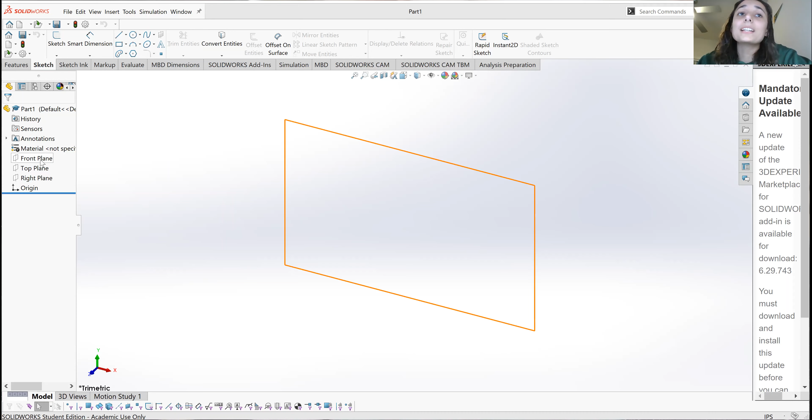Okay, so first off, we have our part open. We're gonna click on the front plane, go up here to view orientation, and go over here to front. You should be able to hover over the different cube positions and it'll show you, oh, this is the front, this is the top. We're gonna go to front. Okay, now we're angled in the position we want to start our part.

So to start a sketch, I'm going to click on the plane I want the sketch to be on. I want mine to be on the front plane—I would recommend the front plane. Then we're going to go up here to sketch.

Once we've clicked on sketch, I'm going to make a center line just for reference, because a little trick we'll be doing after we're done with the sketch is revolving our sketch to make the actual rocket, which is really cool. But you need something for the sketch to revolve around, so we're going to make a revolve line.

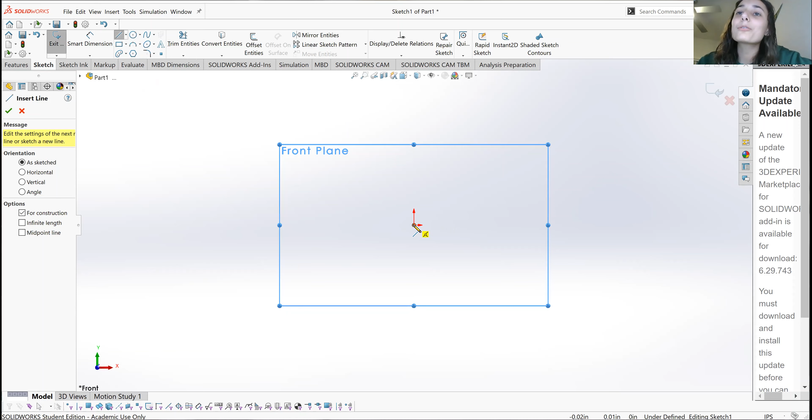So I'm clicking on the origin. You should be able to hover over it and click on it, and it'll turn orange—that means you've selected the origin. Then we're going to drag and make sure it says 90 degrees, then click again to make sure the line has ended.

Now I'm going to click on this line again—you have to click twice when you do the dash line so that I don't end up with a bunch of lines being made and going all over the place.

Okay, so the number one thing to do when making parts is make sure you know your dimensions. One thing I forgot to do is make sure the units are correct. We're going to be in millimeter units because that's what the printer prints in, so it's just easier for the dimensions.

So we're going to go down here to this corner. Mine says IPS—you're going to click on it, and we're going to change this to MMGS, that's millimeters, grams, seconds. So when you're typing in, oh, I want this to be 55, it's going to be 55 millimeters versus inches. I'm going to click on that and make sure it's changed.

Okay, so doing that, I'm going to get back into sketch mode. I'm going to click on this sketch, and then click edit sketch. All right, back to dimensioning.

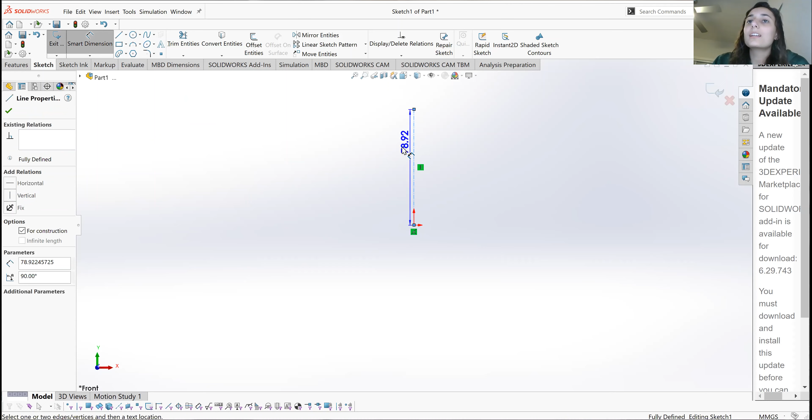We're going to click smart dimensioning, then click on that line we made, drag out, and click again. Now I'm going to make this 195 millimeters because that's the max volume—max height, sorry—we're going to be building in. Okay, so now it's the correct dimension.

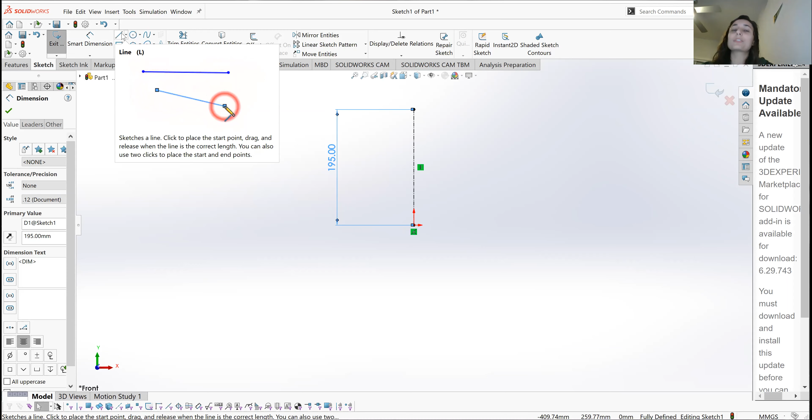We're going to click out of the smart dimensioning by clicking smart dimension again, and go back to our sketches. So first thing I'm going to do—you kind of think of this as the cross section of your rocket, like you took the rocket alongside and sliced it down the middle. It's kind of like the profile of the rocket, and that's what we're making in the sketch.

So right now I'm going to make the bottom. I'm going to make sure that there's an orange highlighted dot—I don't know if you can see this, so I'm going to zoom in so that you can see that.

Accidentally. Okay, we're going to make sure that we clicked on our line, and we're going to make sure that we have an orange highlighted dot, which means the lines are going to be connected. We're going to click on it, drag, and then click again.

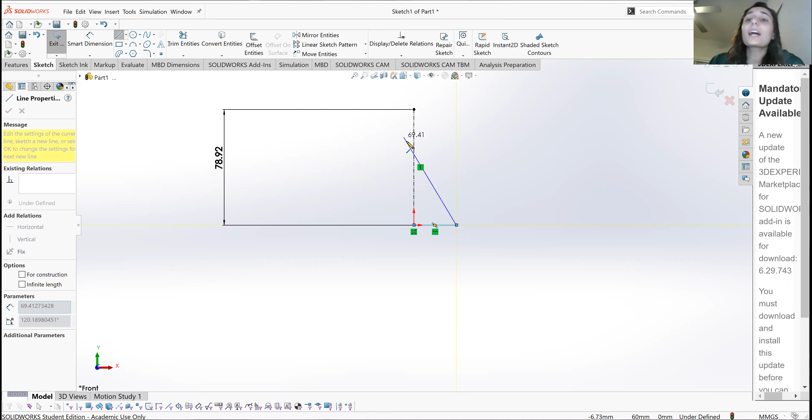Now we want everything to be dimensioned. So once again, we're going to click on this line so it's out of line drawing mode, and click Smart Dimension up here to dimension this line. I'm just going to put 20.

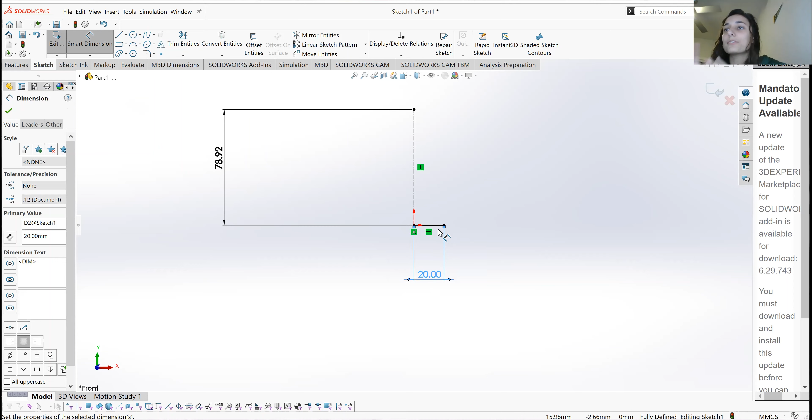Like most of these dimensions you can play around with and do whatever you want with the rocket. One thing to keep in mind is with this distance, you're eventually going to make a hole for the motor to fit in, and the motor's diameter is about 18 millimeters. So the radius is 9 millimeters, and you want this bottom to be almost at least double that, so at least 18 millimeters for this length.

Also, the bigger the base of the rocket, the easier it is to print. But you want to have as light a mass as possible for your rocket so it goes farther. So it's up to you - you're the design connoisseur.

Okay, so we got this line and its dimension. We're going to click out of Smart Dimension, and make another line. So we're going to click on line.

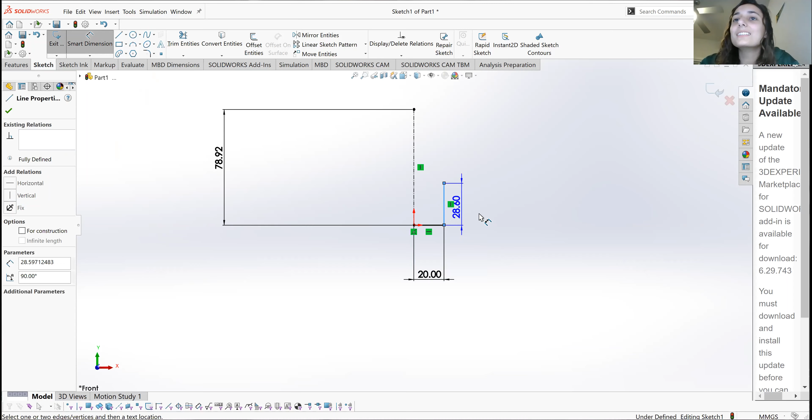Make sure we hover over the other line's endpoint so it's orange, click once, and then drag up and click again. Then we hit line to get out of the line drawing mode and Smart Dimension this line again. I'm going to make this 60.

But you know what, it's up to you - whatever lengths you want to do, you do you.

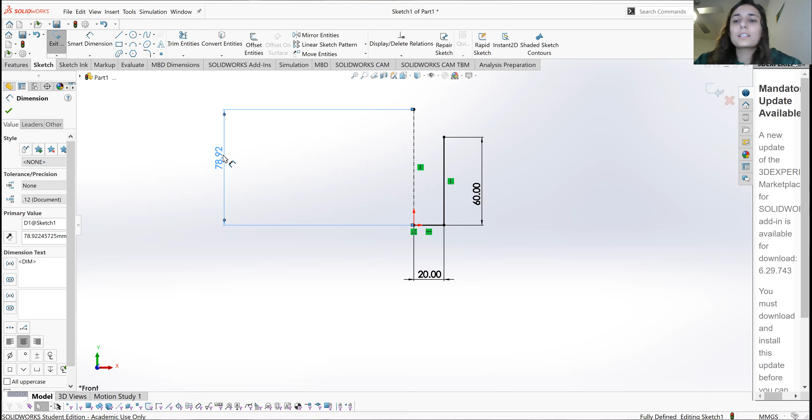Okay, I realized as I was doing this that this dimension is not 195 like I wanted it to be. So I'm going to double click on this dimension and do 195 to make sure it is proportional. Now I'm going to go back to drawing the rocket.

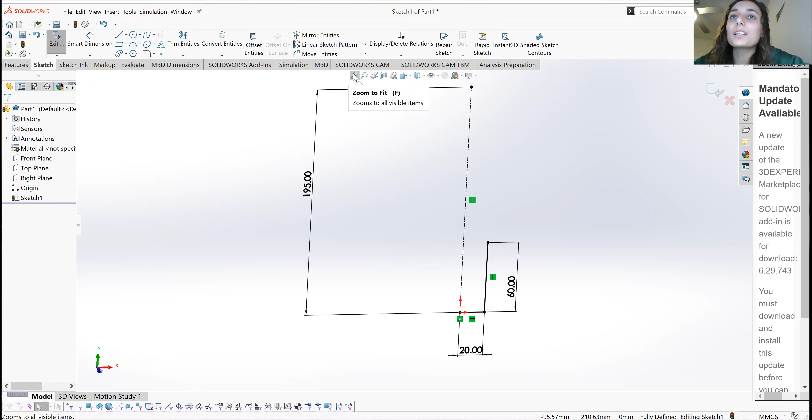So I'm going to make sure - whenever your rocket's out of view in SolidWorks, you can click this button and it'll zoom to fit so you can see the whole rocket. I accidentally changed the orientation, so I'm going back to view orientation to make sure I'm in the front view. You can do front like this. Okay, so back to drawing.

We're going to click another line. Yay, we love lines. And we are going to just draw an angled line.

Whenever you're drawing angles, you want to have gradual movements in and out so it's easier to print. So I'm going to click line again to get that line away so I can Smart Dimension. Okay, I want to make sure this length is 25.

Once again, it's up to you, it's your piece of art - whatever length you want, you do. Okay, I'm going to click out of Smart Dimension again and get on to drawing more lines.

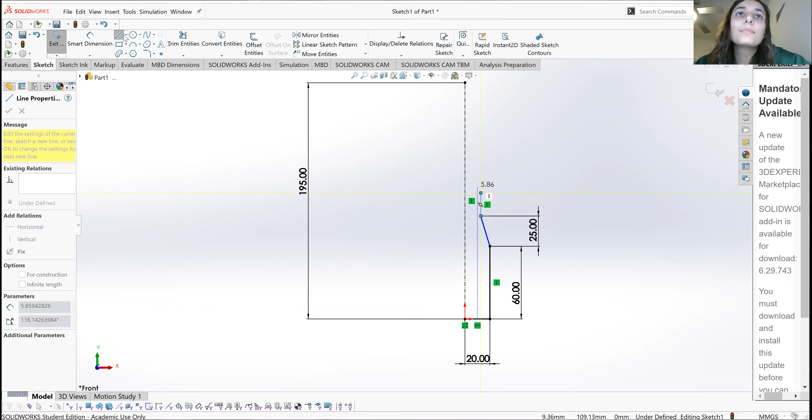I'm going to make sure that orange little dot is there, so the lines are being connected. I'm going to draw another line, click to get out of the line drawing, and click Smart Dimension to dimension that line again. Okay, we have 15 - I'm just picking random dimensions because it's fun.

I'm also going to direct this to be a certain angle, because why not. So I'm going to click on this line and then click on this other line, and when you click two lines in Smart Dimensioning mode, it'll turn into an angle. I'm going to change this angle to 160. All right, gonna click out of Smart Dimension mode.

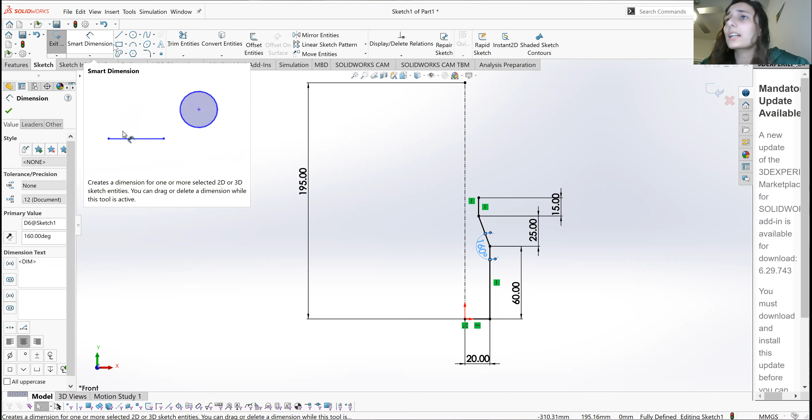And I'm going to do another angled line. Now this I'm going to do specifically as an example for whenever you're 3D printing. Okay, so I clicked, made sure there was an orange highlighted part, clicked again - I'm clicking in line mode. One thing to notice: whenever you're doing angles, you can visualize this like the rocket.

This is the bottom of the rocket, this is the top, and it was cut down the middle and then quartered again.

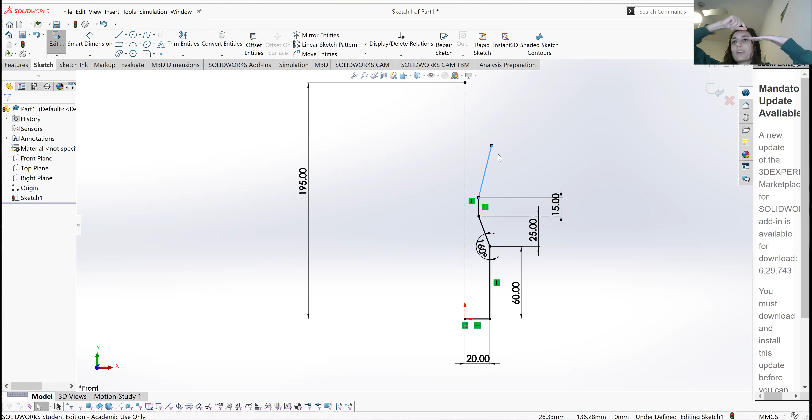You want to make sure all your angles are gradual because the 3D printer prints layer by layer. If you have really drastic angles, like let's say instead of my angle being right now like this, the 3D printer has to pretty much print over air to get that angle.

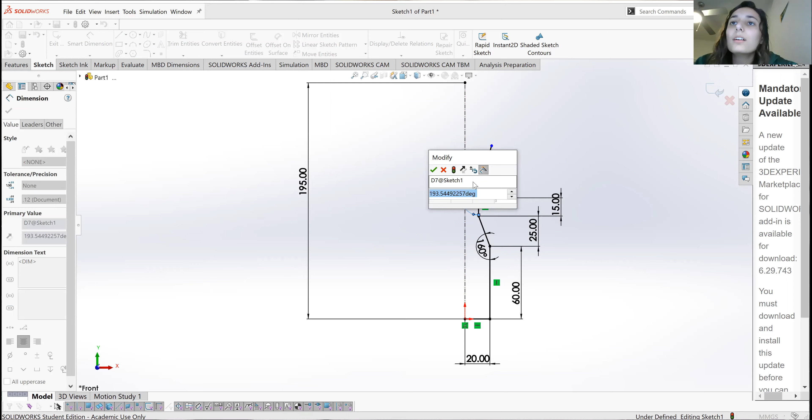And it just turns into a big mess. So what I want to do for this angle is click on this line and then click on the line beside it so I can change the angles. I'm going to change this to 185. So if you look over here, the angle between this line and a straight up and down line is actually really small.

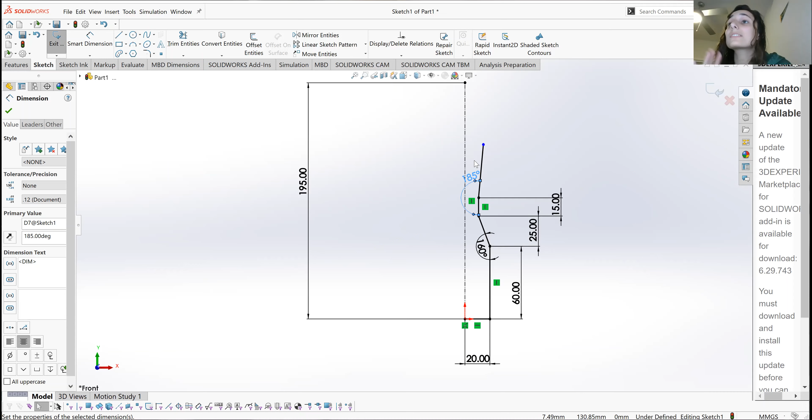So the general rule of thumb for this angle, from a straight down line to this line, is you want it to be less than 45 degrees, because any more than that you're really risking the print failing for your rocket. All right, let's get back to creating.

We're gonna put a curve in there. Why not? Let's make it curvy. I'm going to click on the curve, click on the little down arrow, and we're gonna do a 3-point arc. I'm gonna click right here, make sure the orange dot is at the end, the very tip of the rocket, and then the other is gonna be at this other line's endpoint.

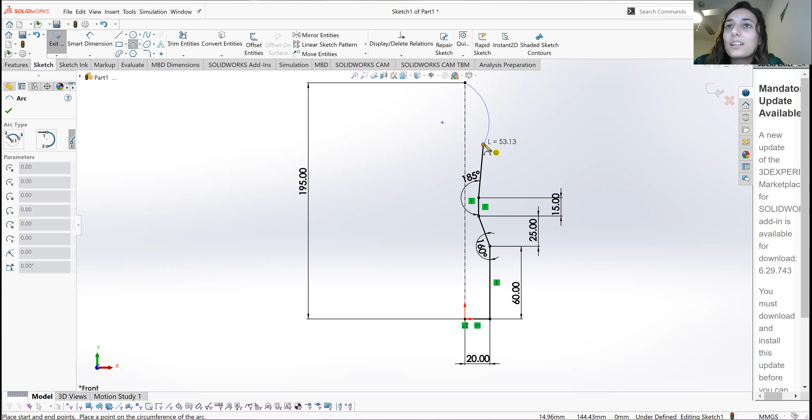And then I'm gonna make it like this. Why not? You click again to finish the curve. Now I'm gonna click on three point arc, and I have my drawing of the quartered cross section of the rocket.

So now what do we do? We got our sketch, and yours could look totally different. You could have just a straight up and down line. You could make a cube if you wanted to, just a square, and then put a hole in it and shoot up into space. You do you.

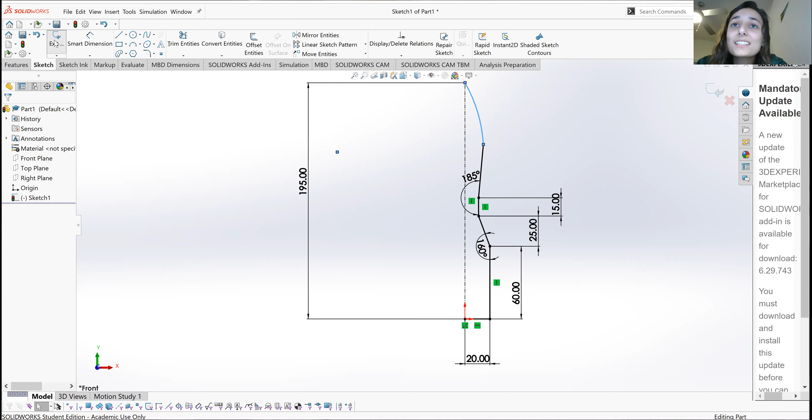Let's exit out of sketch. Now is the fun part. We're gonna go to features, click on sketch, and we're gonna do revolve base sketch, or revolve boss base.

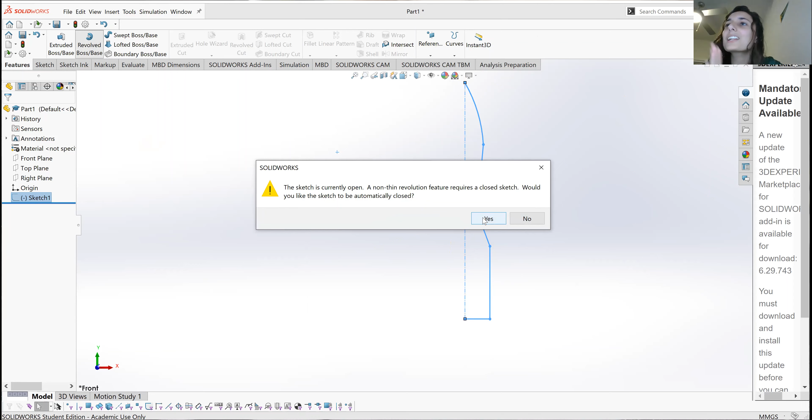And we're gonna put yes to this message. It's just saying, hey, do you want to treat that dashed line as part of the sketch? And yes, we do. All right, and it should look like this.

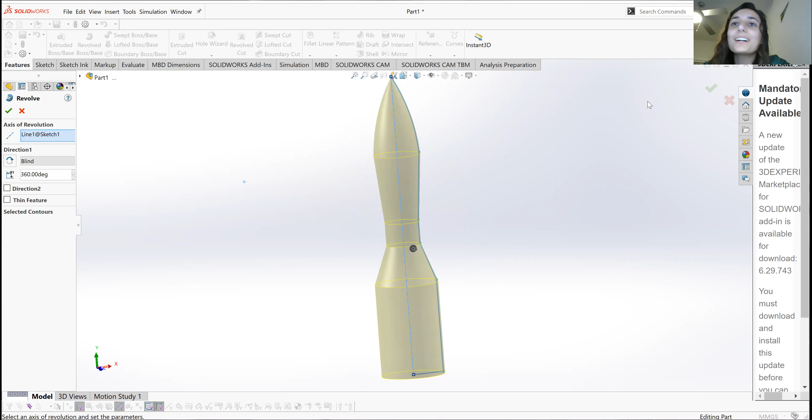If you do end up having trouble with this feature, come to questions next Thursday and I'll be able to answer them. Okay, so this is my rocket, a little crazy looking rocket, but we're gonna click the green check mark. Yes, we want this revolved like that.

So one thing to note, like I was saying, you want to make sure the base of your rocket is bigger -- the bigger the base, the easier it is to print because there's more to build off of. And with 3D printing, it builds layer by layer up here.

So you see how this angle right here is not drastic. It's easier for the printer to print layer by layer and print out. If it's too drastic, then the 3D printer has nothing to build the top layer off of -- it's practically building off of air.

And I've just Googled videos of that and it'll show you kind of visually if you're struggling, because I'm a very visual person as well. All right, we're gonna make some fins and then we're almost done.

Okay, so I'm gonna make sure my orientation's good. I'm gonna go down to here and change it to front again because I had moved it around.

Okay, so with the fins, you can put fins wherever you want. Just realize, like I was saying, you want no drastic angles. So if you're gonna make a fin way up here, it's gonna slowly have to build out and then go back in, or whatever -- you do you.

No drastic angles -- I'm just gonna draw a fin right here and then go straight up. It can't just go straight out, the printer won't be able to do that.

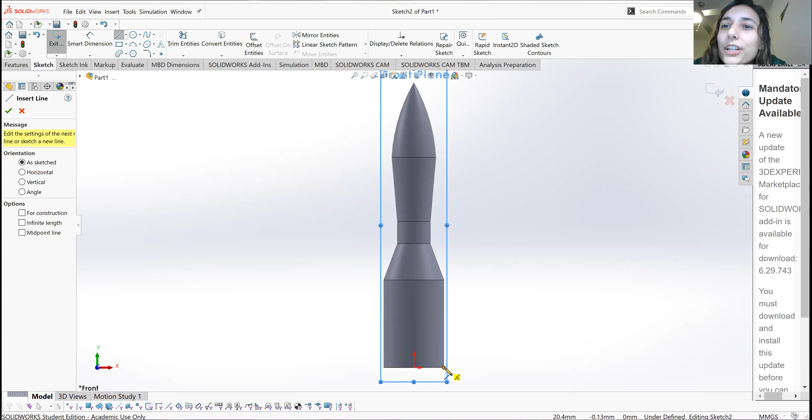Now we're gonna draw our good old friend Line, and we're gonna go to this very corner of the rocket. You see that orange dot? It's our friend, we're gonna click on that. We're gonna drag out, click again.

Now this time, instead of clicking line to get out of line mode, we're just gonna draw another - keep going, just drag, and click when you see this orange dot. That means the sketch is touching the actual object, because you don't want just the fins floating in air, because you won't be able to print them, like it won't be attached to the rocket when you're printing.

All right, now we're gonna go down here, keep dragging, and make sure that orange dot appears again. Okay, so now we have our first fin. We're gonna click line right there, get out of line mode and smart dimension. We're gonna click on this bottom line. I'm gonna say I want my fin to be 20 millimeters, but again, you do you on your fin.

If you want it to be not just triangle shape, you want it to be a curve or something crazy, you do you - this is supposed to be fun. Anyways, we're gonna click out of smart dimension mode. There you go, we have our first fin.

Now we're gonna do another fin. I'm gonna have 4 fins on mine - if you want more on yours, you do you. I'm gonna click that corner where that orange dot is, gonna drag up the line, click on that orange dot again.

We're gonna make sure that when we're drawing our line, you see that dashed line that lines up with the other line I drew. We're gonna make sure that appears so we know everything's lined up. Should show up once you've dragged low enough for it. Click, then drag, click.

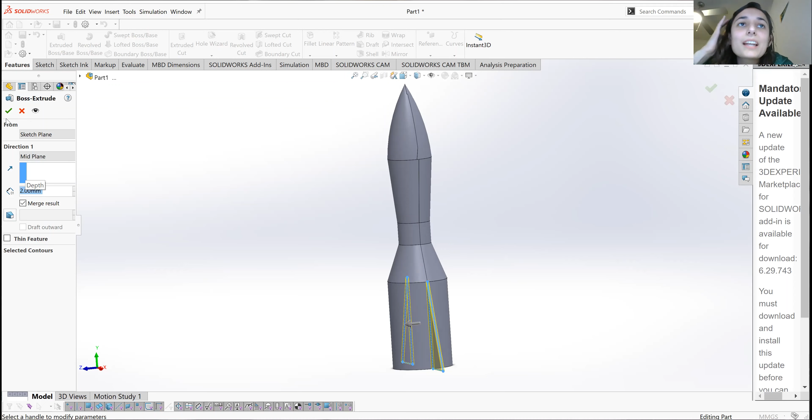And I don't want my fins that thick - if you want them that thick, you do you. I'm gonna do 2 millimeters, because why not? I don't know, there's probably science behind it. You can always study if you're trying to win, but if you want just a cool design, you do you.

All right, green check mark, click on that. We got our first set of fins done. Now let's get the last set.

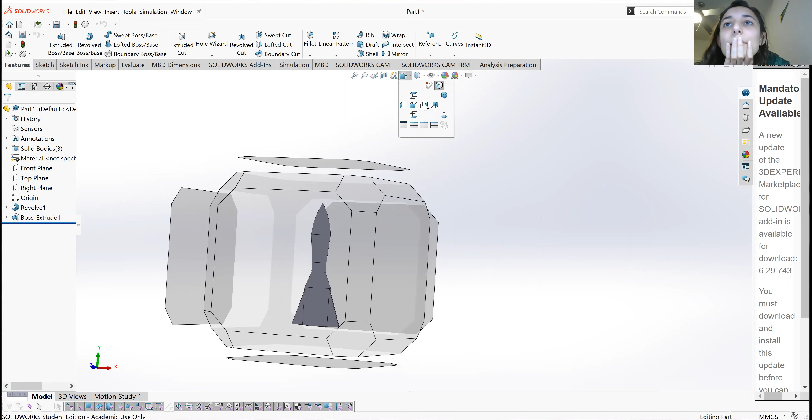Okay, so I'm gonna change my orientation by clicking up here, and I'm gonna do it to the right. I'm gonna click right orientation. All right, so you should be able to see the next side of your rocket. We're gonna click on the right plane right here, click on the right plane, do sketch again.

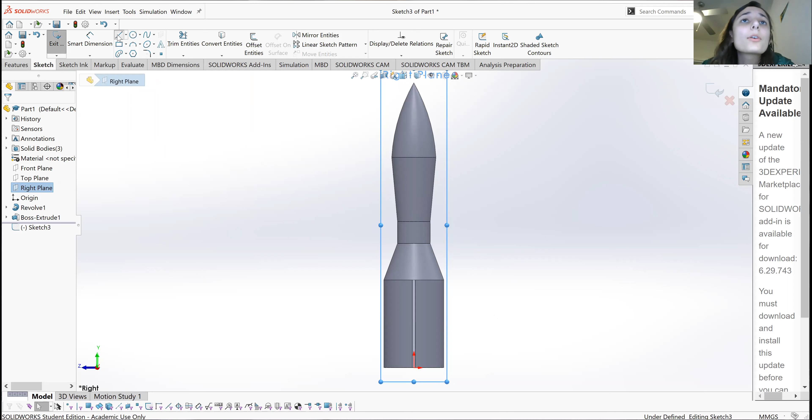And we're gonna do the same thing we did last time. We're gonna click on that line, find that corner, that orange dot, drag, make sure it's like 180 degrees, drag again, and make sure that orange dot appears, click, drag, and click.

All right, now we're gonna get out of line mode, smart dimension. And I'm gonna click on this line, and like last time, I'm gonna do 20 millimeters, because why not? Get out of that smart dimensioning mode.

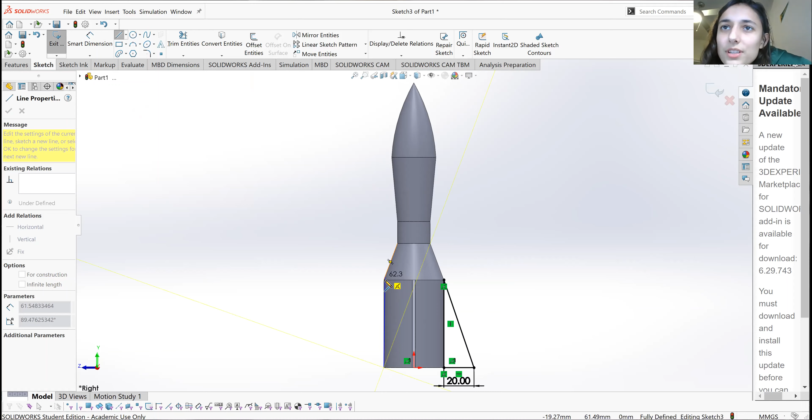On the line, find that corner, that orange dot, click on it, then drag it up the line. Find that orange dot - I'm struggling. Okay, found it, click on it.

And then I'm gonna drag it down until I see that dotted line so I know everything's lined up. Click, drag, and click again so there's an orange dot. All right, we're gonna get out of line mode, click smart dimension, and click on that line to make sure everything's symmetrical because that's awesome.

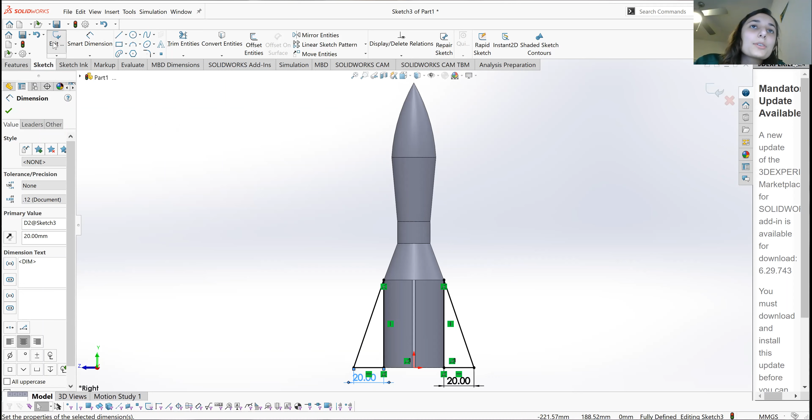Get out of that dimensioning mode. All right, we got our sketch done. Let's make it 3D, so I'm gonna exit sketch. Make sure my sketch is clicked, you can click it again if you want. We're gonna go to features, extrude boss base, and instead of blind, we're gonna make it midplane. It's already at 2 millimeters, so we're gonna hit that green check mark.

All right, you see the rocket is pretty much finished for now. I like to make sure edges are smooth so you're not poking yourself when touching the rocket. So I use this cool feature called fillet, and it pretty much smooths out corners, makes it more gradual. This is just a fun little feature, you don't have to do it if you don't want to. Again, you're the designer, you do you.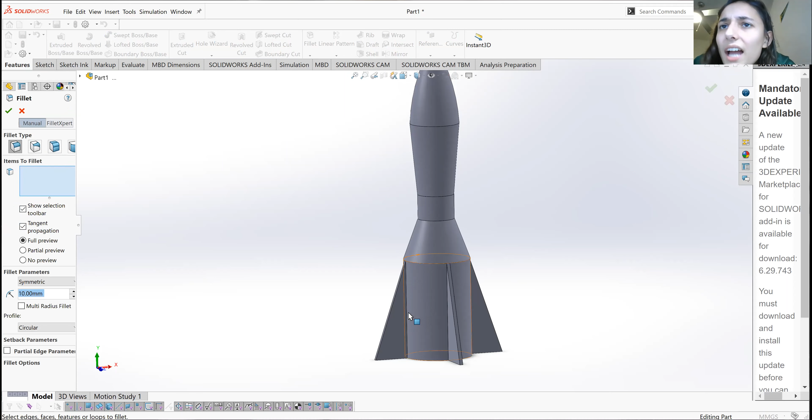So I'm in the features menu, I'm gonna click on fillet. Let's say I'm gonna zoom up real quick. Say I don't like how that's a drastic corner with my fin, I'm gonna hover over the fin corner till it's highlighted, and click on that.

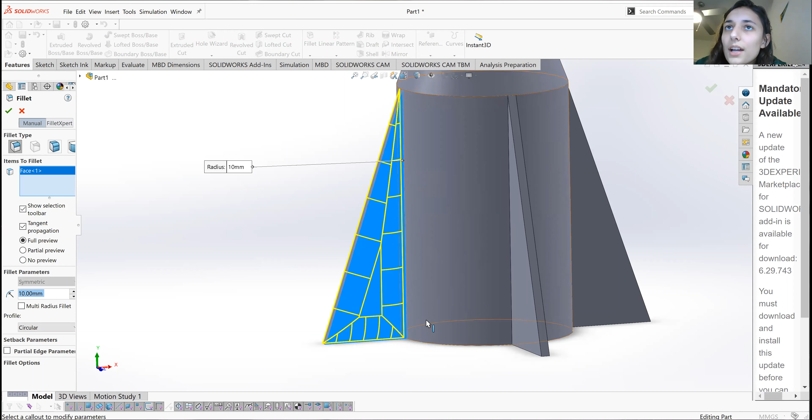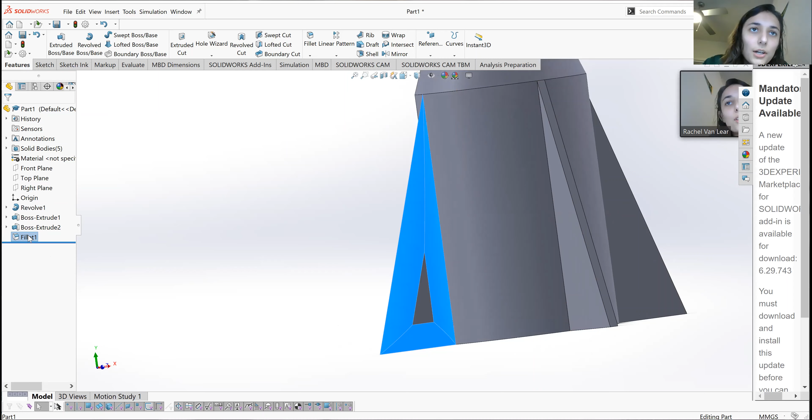Then it's gonna make it so everything's filleted. What I mean is I'm gonna check the green one, and it'll smooth all the corners out on one side. Then you can do the other side as well, but that's not exactly what I want. So let's say I don't want this feature. With anything, you can go up to this little feature tree, right click on fillet, and press delete because I don't like it. I'm gonna get rid of it.

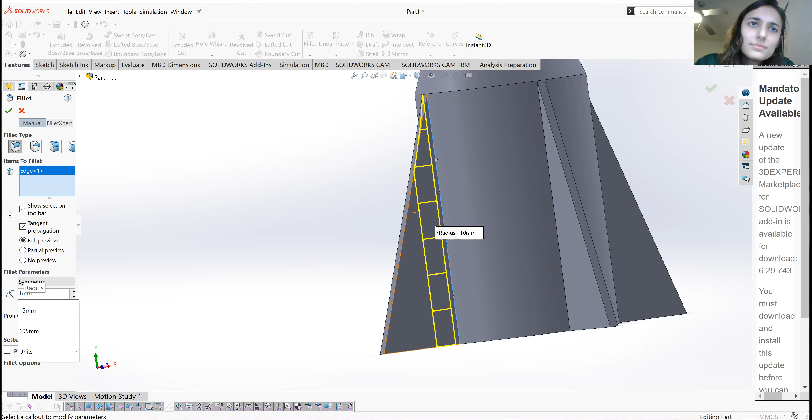All right, we're gonna go back to fillet, and I just want this line. I clicked on the hovered line and it's highlighted. Let's say I don't want such a drastic change, just a slight gradual fix to it. So instead of 10 millimeters, a smaller number means it's gonna be like a quick little fix on the extreme corner. It won't be an entire smooth surface, it'll just be like the corner's a little bit less crazy. So I'm gonna say 1, and click the check mark.

All right, you can barely tell, but the corner now is smoother, it's not so drastic. Sorry, my finger. See, it's not as drastic of a corner. It's hard to tell until you have it physically in your hand.

But what you can do is go out to each little fin. I'm gonna go to fillet again, click on that little corner so it's highlighted, and click the check mark. Then I'm gonna keep doing it until I don't want to anymore.

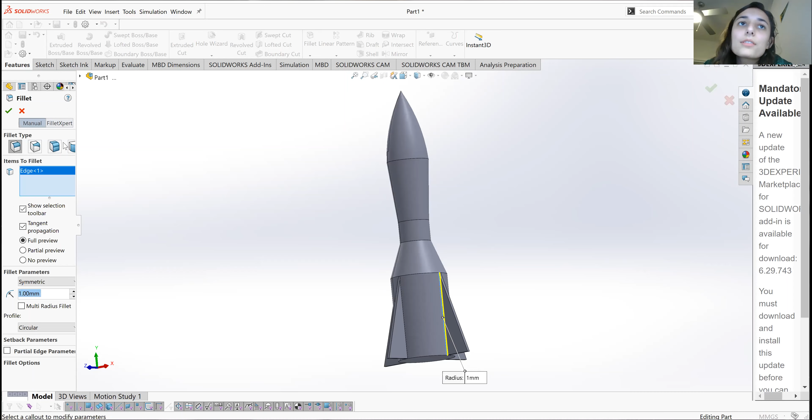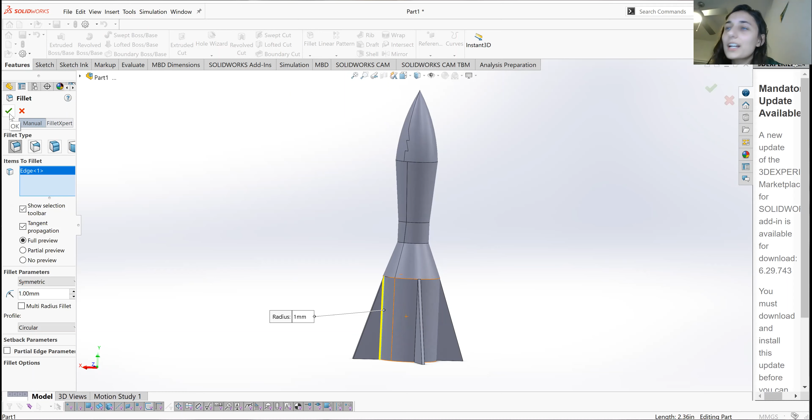So fillet, and then click the edge I want to fix. Now usually with fillets you can click multiple corners, but since this is a circular or cylindrical object, it doesn't really like it when you select multiple corners. You kind of have to do what I'm doing now: fillet, click on that corner, green check mark, move on to the next edge I want to fillet.

All right, so you get the picture. If you want to fillet, go ahead and fillet, it makes less drastic corners.

Anyways, by the end of this video, you should have just a general rocket. Next video, we're gonna work on making a little compartment for the motor and the parachute, and making it so the nose comes off as well, so it's actually two parts.